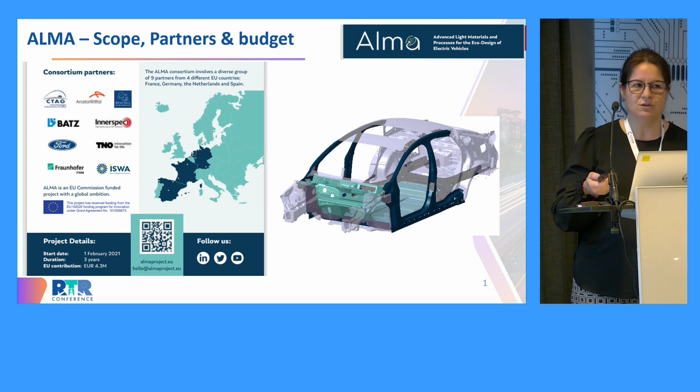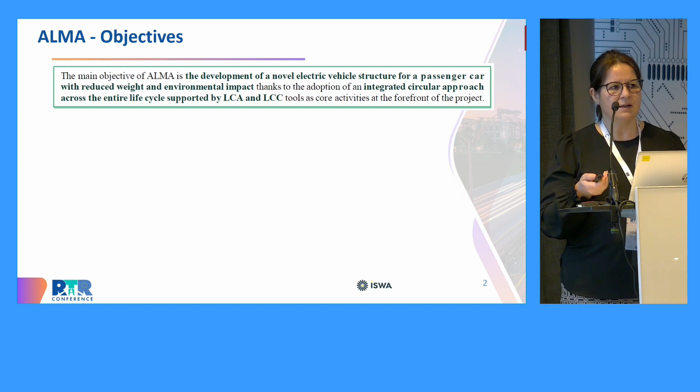The main goal was to develop a new structure for electric vehicles with reduced weight, with reduced environmental impact and with the big goal to increase the range of the vehicle. For this, our approach was to introduce eco-design supported by LCA and LCC tools. I think ALMA was a very ambitious project because we touched several different points. First, we start with the eco-design. I'm going to go in deep later, but the idea is to have several constraints in terms of lightweight, reduction of the consumption of materials, etc., to be sure that the parts we are developing have the minimum environmental impact. Then we work with different advanced materials. In this case, we chose advanced steels developed by Arcelor, and structural SMC, sheet molding compound, developed by BATZ.

Obviously, all these materials were characterized. We were to simulate the behavior, etc., both for materials and later for components. We had two innovative technologies concerning efficient separation and the health inspection.

That means that, as you know, we think that the very best solution for having an innovative structure is to combine materials, the multi-material. So we always say the right material in the right place. And this is fantastic, but you have to join these materials, and at the end of life of the project, you have to disassemble these materials.

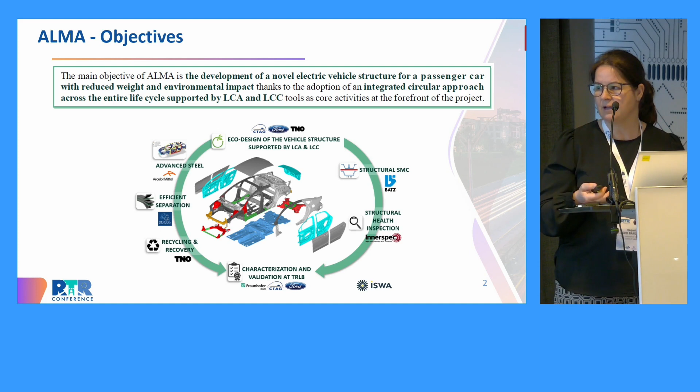Obviously, it's really important to be sure that the new materials can be recycled. So TNO was the partner devoted to this question. And when we talk about a new platform, a new structure for the vehicle, we had to be sure that all these parameters, all these new parts are working well together. So we need to simulate the parts, the subsystems, but obviously the full vehicle. So CTAG and Fraunhofer were responsible for this validation.

And we had also some physical prototypes to be sure that all the design is also feasible, and we are able to manufacture these parts. So as I mentioned, very ambitious project, touching many different questions, and the big goals were to decrease the weight by 15%, more or less, concerning the baseline, and to improve by 11% the LCA, the environmental impact.

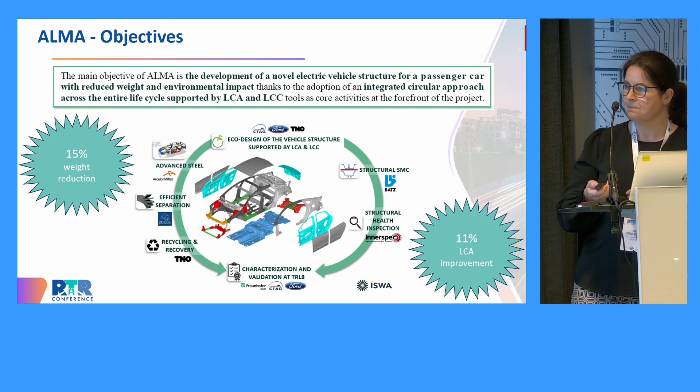Okay, this was the objective, so we started. We started with the eco-design, but as I mentioned before, supported by LCA and LCC. So, first point, we have several constraints. Several constraints due to the materials we are using, but also the constraints we have due to the structure we are developing. So we have to develop a new structure, but it is mandatory to pass all the crash tests. So the behavior of this new structure should meet all the requirements we have for the automotive sector.

The cost is important also. I always repeat that we are in the automotive sector, so for us, the money, the cost is a constraint itself. So we are approaching this project for lightweighting, but the cost is important, and the quantity we put was 3 euros per kilo saved. It's not a quantity I said, it's the market, the OEMs who put this quantity. So materials, I repeat, several different grades from steel and SMC materials. And with this constraint, we have a first bill of materials.

But we have to select, we have to define what are the best. I mean, there are several parts where it is really clear that steel, different grades of steel, are the best option. There are others where SMC materials are the best option. And there are others where we have a competition between these two types. So we define a material matrix. I have no time to enter into the detail, but you can guess that we put several factors to decide. Several factors such as lightweight, cost, feasibility to introduce in the production line, etc.

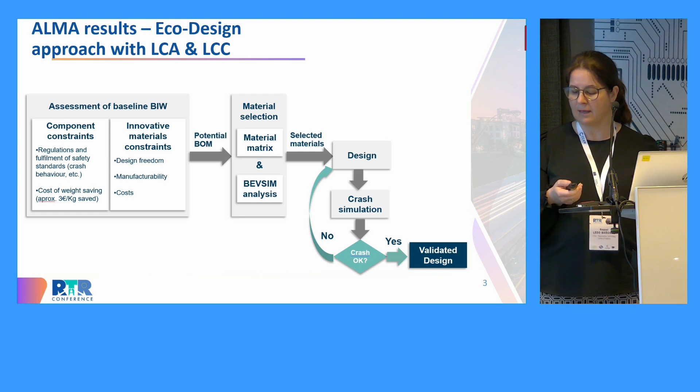So we have the materials, we have the design, and we go to the crash simulation. I told you before, we have to pass absolutely all the requirements we have in the vehicle. Frontal crash, lateral crash, with different angles, etc. That it always works well the first time is impossible or very, very difficult. We have to repeat the process. So we repeat the process, I don't remember how many times, but several times, obviously. And at the end, we have the final design that meets all the requirements.

So I talked before about the materials, these advanced steel materials and the structural SMC. Most parts of the vehicle were developed in steel, obviously, and we chose finally the SMC for the dash panel and for the battery lid.

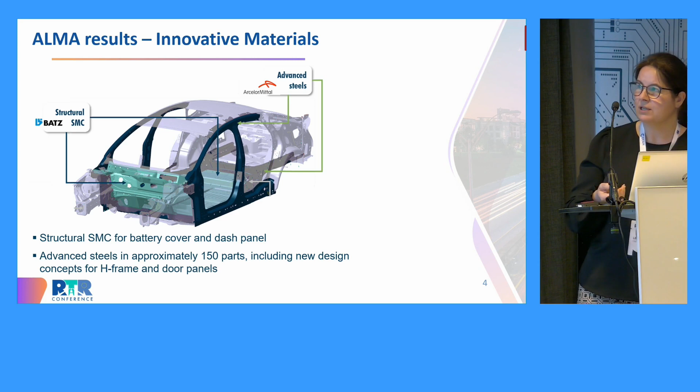In the case of the door panel, the door panel and the H-frame were also manufactured because, as I mentioned before, we want to validate all the structure, all the body in white, by virtual simulation, but we want to be sure that these new materials were able to be manufactured. So we carried out the manufacturing of these two parts.

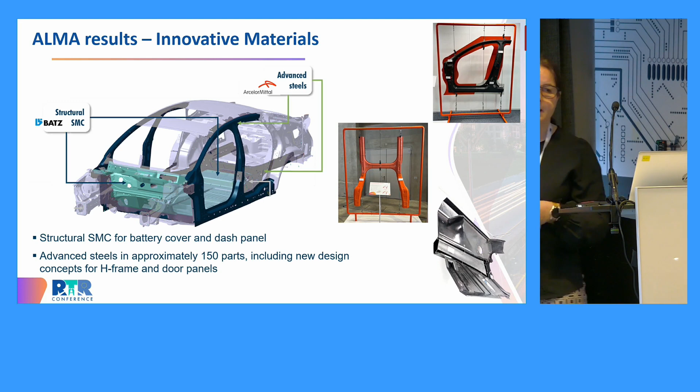It's important to mention, I think I didn't mention, that our baseline was the Ford Mondeo ICE, and now we have a body in white for a Ford Mondeo full electric. It's important to mention that these two parts, the H-frame and the door panel, originally were composed of several parts. I mean, the H-frame was composed of, I think, 15 or 17 parts, and the door panel of 4 parts. And now it's only 1 part.

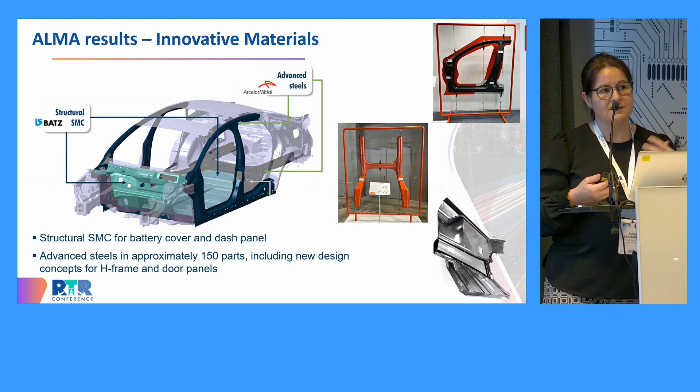That is due to the different steels that we are able to process at the same time in one shot. So you can guess that integrating these functions is a good solution to avoid joints, to avoid extra weight. And in the case of the dash panel, we have the physical prototype in SMC.

As I mentioned before, it's important to be sure that all these materials are recyclable. In the case of the standard steel, it's clear, it's recyclable. But we have a grade of steel that is laminated, thermoplastic steel, so we have to be sure that we are able to separate and process it. And yes, it works. And in the case of SMC materials, as you know, we have thermoset material, resin, and fiber, so we need to be sure that we can separate them. So people from TNO applied different technologies, solvolysis, mechanical recycling, and we could verify that it's okay, that we can separate these different materials.

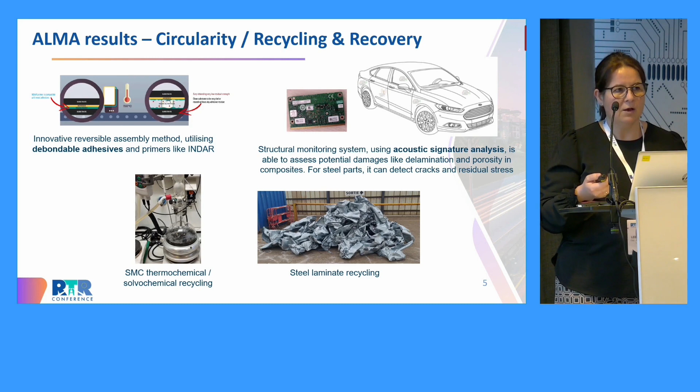I mentioned before the 2 different technologies to be sure that we can separate different parts that are joined by structural joining. And in the case of the system monitoring, we can be sure after a crash, for example, whether one part is right or not, and whether we can reuse it or not.

During these 3 years, we worked on the design, the manufacturability, the recycling, and at the end, we achieved a 22% weight reduction. Our objective, if you remember, was 15, so we are proud of this value. And this was the final prototype where all the design was integrated with these new steels from Arcelor and the new dashboard in SMC. So I think the results are really good. We can be sure that these new materials work properly, and we can have a new body in white, a new structure with guarantees to meet all the requirements.

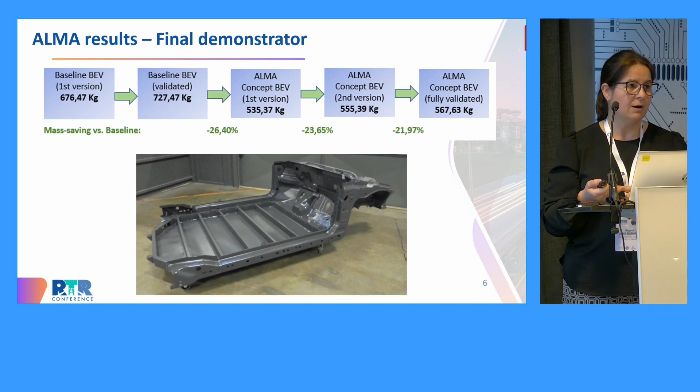If we talk about cooperation with other projects, when we applied for this topic 4 years ago, there were 4 other projects also funded by the European Commission: Levis, Flamingo, Revolution, and Fatigue for Light, which my colleague will speak about later. And we were joined in the Enlight electric vehicle cluster. This consortium of different projects helped us understand how many different approaches can be used to reach the same objective. We can learn from the results of other projects, so we think it was really useful to collaborate with these sister projects.

We always participate in different congresses and fairs. We had our last event at the Global Automotive Components and Suppliers expo in Stuttgart last year, showing our parts. So I always say that the technical work is important, but so is disseminating and communicating, not only to technical people who maybe already know this type of project, but to other people who don't know the projects being carried out in this area.

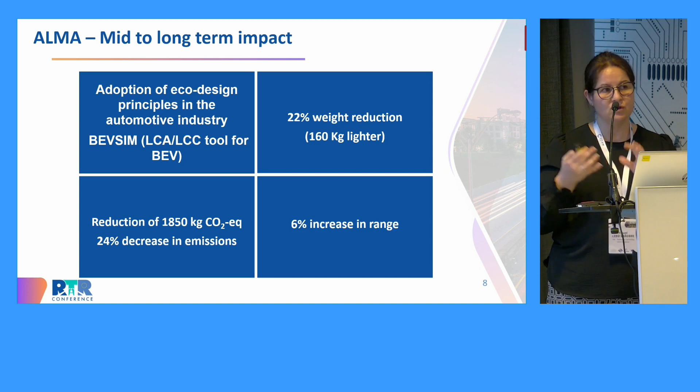I mentioned before that 22% weight reduction was achieved. That translates into a reduction of 24% in terms of environmental impact, if we talk about CO2 emissions. And all this increases the range of the vehicle by approximately 6%. The industrial partners, Arcelor and BATZ, are not here, but last week in our last meeting, they explained that they think that in the midterm, in some years, these new materials and these new design strategies will be included in new cars. So we think it's good news.

And now there is a video. I don't know if you can go. Yeah, that is. Thank you, Xavier. It's a very brief summary.

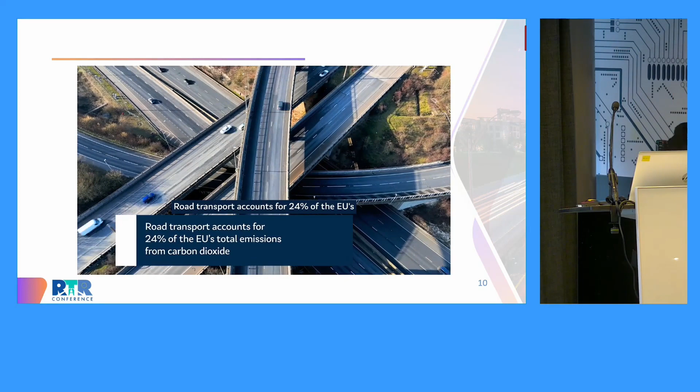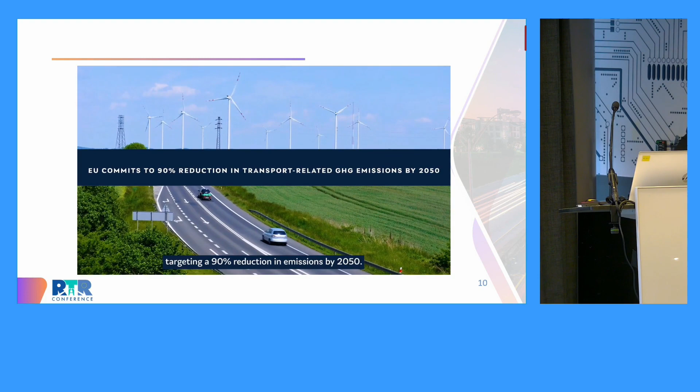Road transport accounts for 24% of the EU's total emissions from carbon dioxide. In response to this environmental challenge, the EU Green Deal is committed to decarbonize this sector, targeting a 90% reduction in emissions by 2050. The ALMA project plays a critical role in this transformation, which involves a significant shift from fossil fuels to electric vehicles that are lightweight, efficient, and sustainable.

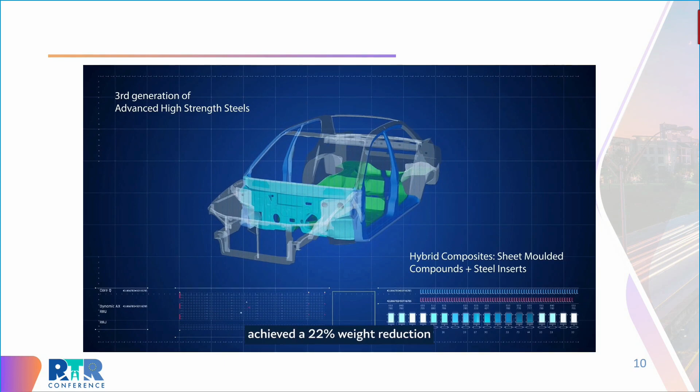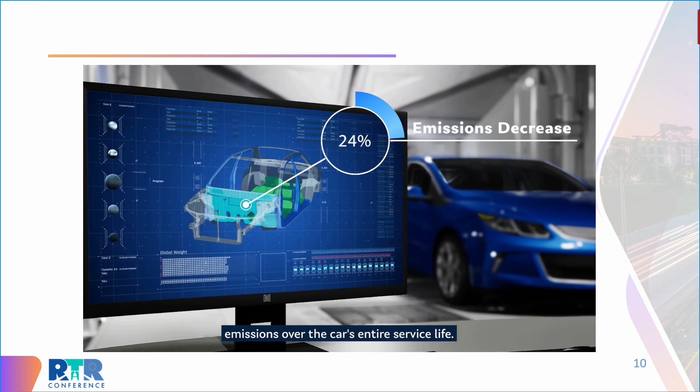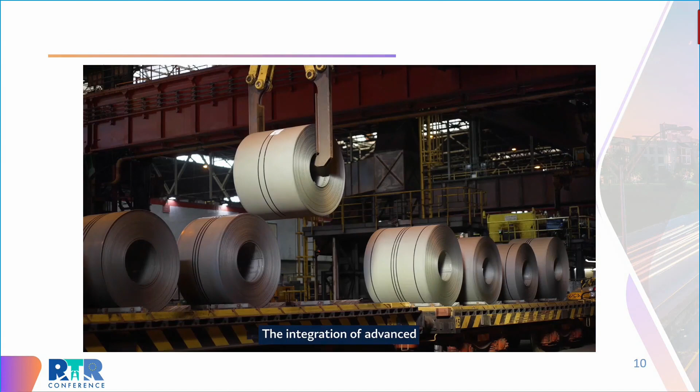By using advanced materials and an eco-design approach, the body in white of ALMA's concept car achieved a 22% weight reduction compared to the baseline BEV body in white. This translates to a substantial 24% decrease in carbon emissions over the car's entire service life. Innovative use of advanced, high-strength steels and lightweight laminates can revolutionize vehicle structures. The integration of advanced steels enabled the new H-frame concept, reducing parts from 11 to 1, decreasing the vehicle's weight and production costs. In some cases, sheet-molded compounds with fiber-reinforced textiles can replace steel for even greater weight and CO2 savings, while maintaining similar structural performance.

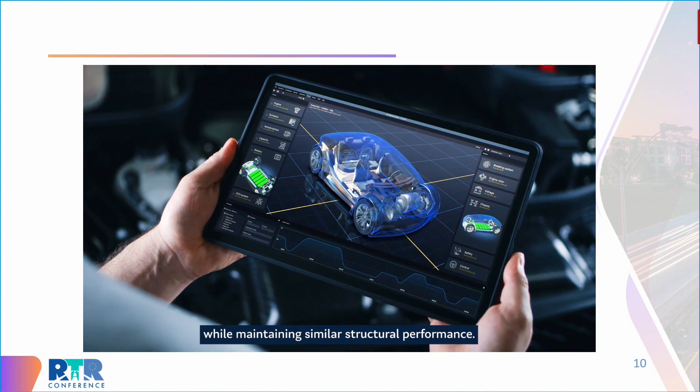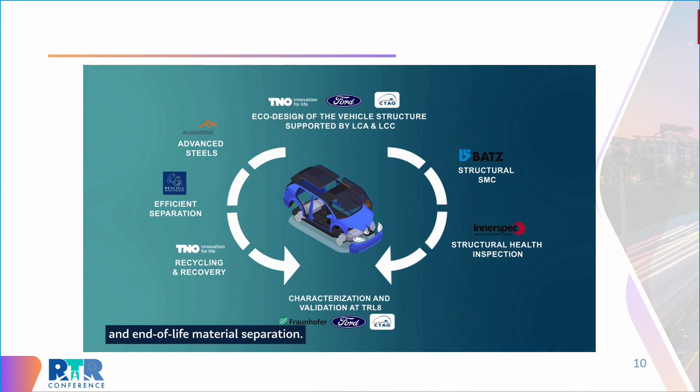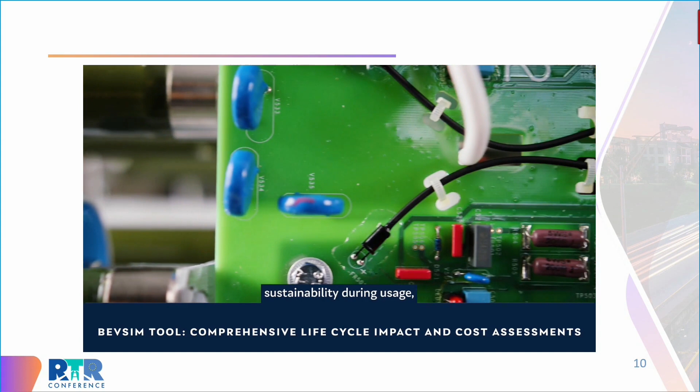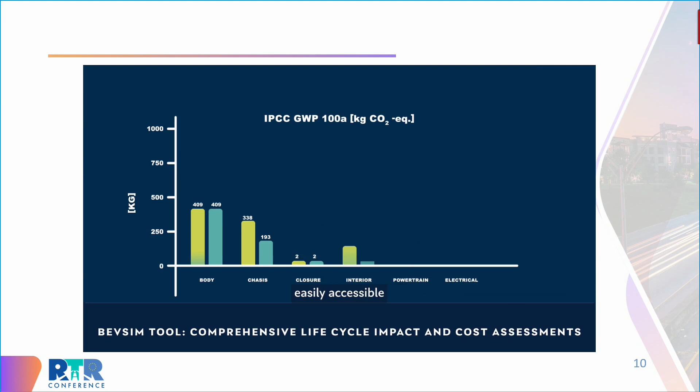ALMA's eco-design approach not only emphasizes weight reduction, but also focuses on circular economy aspects. This includes strategies for easy assembly and disassembly, efficient recycling, and end-of-life material separation. Rigorous safety and performance standards are validated using multi-scale characterization through computer simulations. These were used in simulated crash scenarios, allowing engineers to quickly test alternative designs and iteratively improve the concept, saving time. ALMA's approach to eco-design involves complex trade-offs. While some materials offer sustainability during usage, their production and end-of-life phases might cost more environmentally. The BEVSIM tool makes comprehensive life cycle analysis and cost assessments easily accessible to designers and engineers.

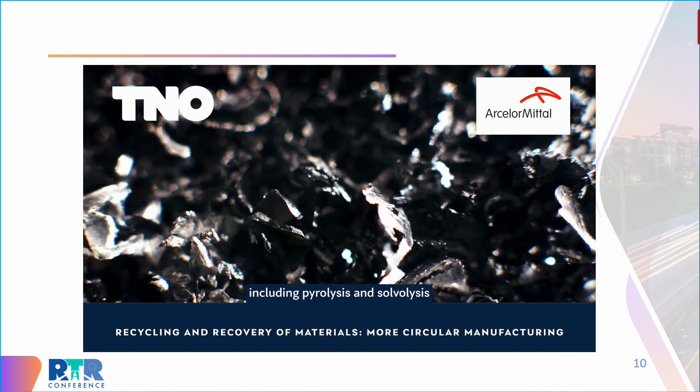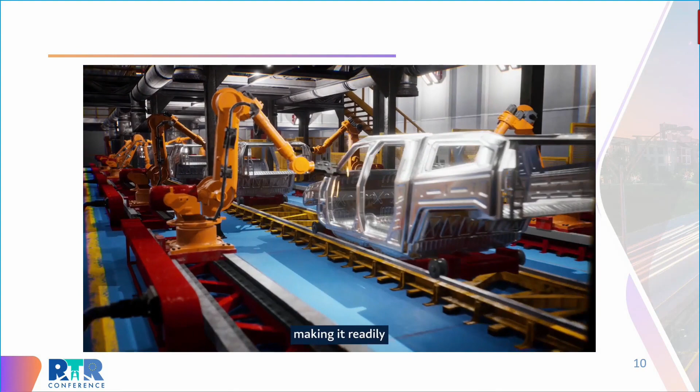Continuous structural monitoring is another key component which will allow for early fault detection and preventing critical failures. This enhances both vehicle safety and longevity. For end-of-life scenarios, ALMA applied debondable adhesive for efficient separation of materials through heat triggering. ALMA identified potential routes for recycling and recovery of advanced materials, including pyrolysis and solvolysis, paving the way for more circular manufacturing. In conclusion, the ALMA eco-design integrates with current automotive manufacturing processes, making it readily adoptable by the industry. You too can use this approach and advanced materials to increase range and performance while saving materials, energy, and CO2 emissions.

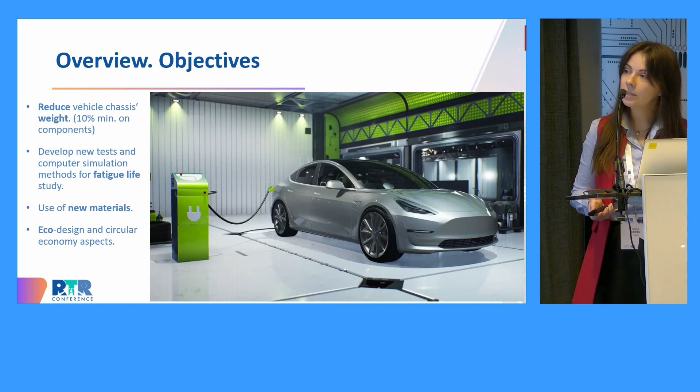Of course, we wanted to foster the implementation of new materials, which can give an interesting weight reduction potential, I would say. And we were committed to using eco-design and circular economy aspects while we were performing this lightweight assessment on the chassis components.

Here you can see our first project video. We have a new one, by the way.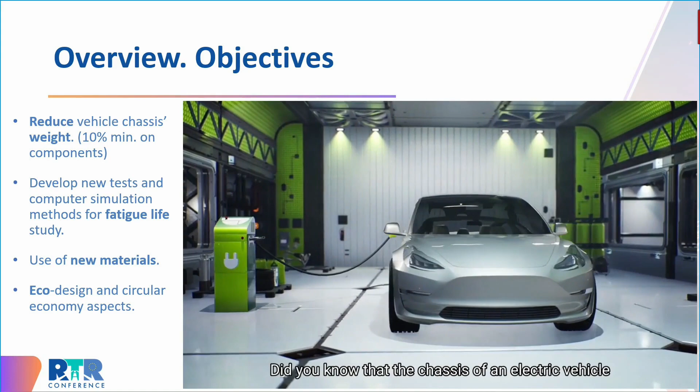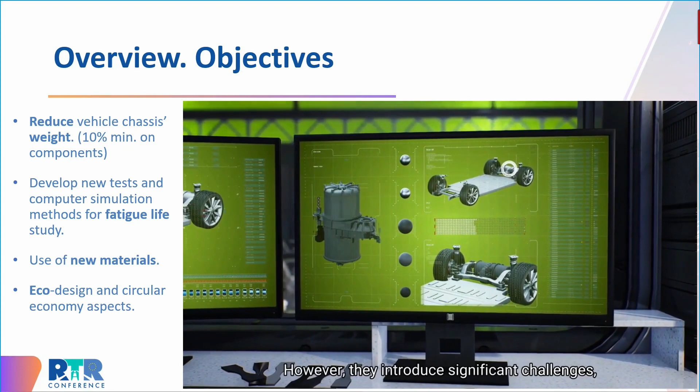The chassis of an electric vehicle accounts for 50% of its weight. What if we could reduce the weight and thus increase the vehicle range while contributing to a more sustainable mobility? Lightweight materials have been around for some time, with great potential in reducing the vehicle's weight without compromising safety. However, they introduce significant challenges related to part design and performance prediction.

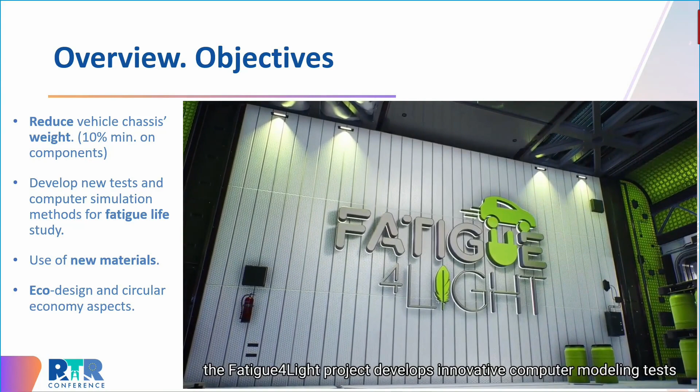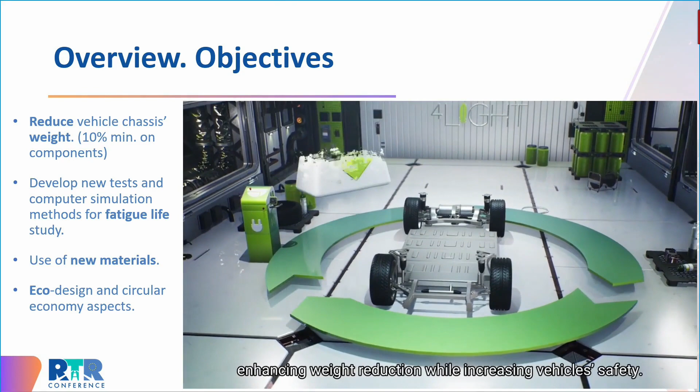To solve these challenges, the Fatigue4Light project develops innovative computer modeling tests and experimental methodologies to select the optimal materials for lighter vehicle chassis and reduce the testing time for new materials. Based on eco-design and circular economy values, Fatigue4Light aims to boost the use of lightweight materials adapted to the chassis parts of electric vehicles, enhancing weight reduction while increasing vehicle safety.

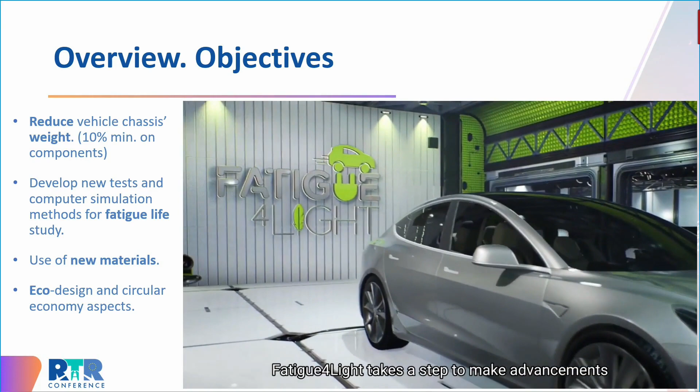As one of the first projects tackling weight reduction in electric vehicles' chassis parts, Fatigue4Light takes a step to make advancements in building a zero-emission future, while simultaneously minimizing production losses and meeting the industry needs.

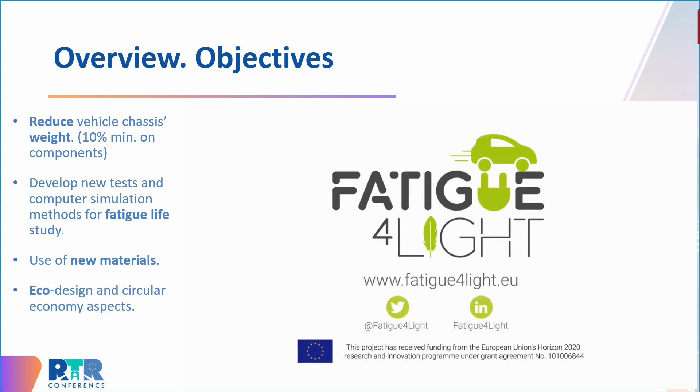Let's go to results presentation. So here I'm going to show results from several different perspectives. And first I want to share with you all the work that we've done from the experimental point of view. Several teams were intensely working these past 3 years on several different campaigns at different levels, at different scales.

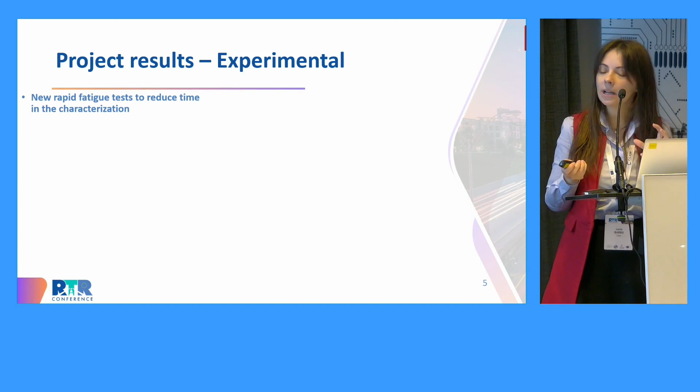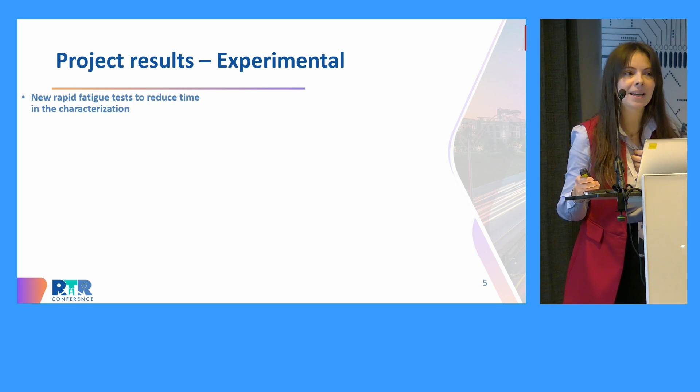And we started thinking at coupon scale about how we wanted to reduce the experimental time needed for a complete, comprehensive fatigue experimental characterization. Now, I don't know if you are familiar with all that fatigue entails, but I would say one of the main characteristics when you are dealing with fatigue is that you need to have a very, very thorough experimental campaign to consider that you have properly characterized your material. And that means you need to spend a lot of time experimentally. Fatigue tests are super, super expensive.

This is why we devoted a lot of time in the project working on fast fatigue characterization procedures. These are fast fatigue tests that allow you to go from maybe 1 month that you had devoted to obtaining your SN curve, which is stress number of cycles curve, to as little as 2 days for one SN curve, or if you are only interested in the concept of fatigue limit, you can have it in 4 hours. So the reduction in experimental time really is quite significant.

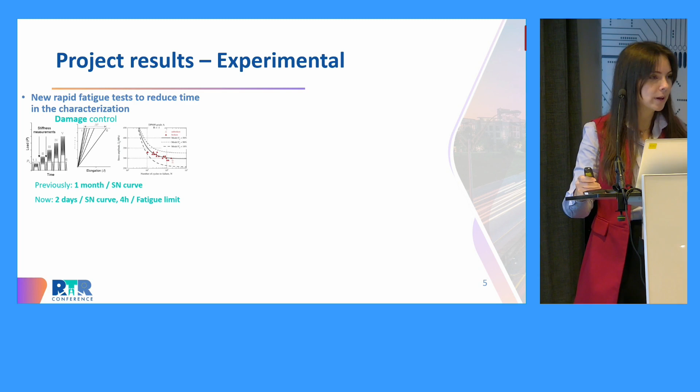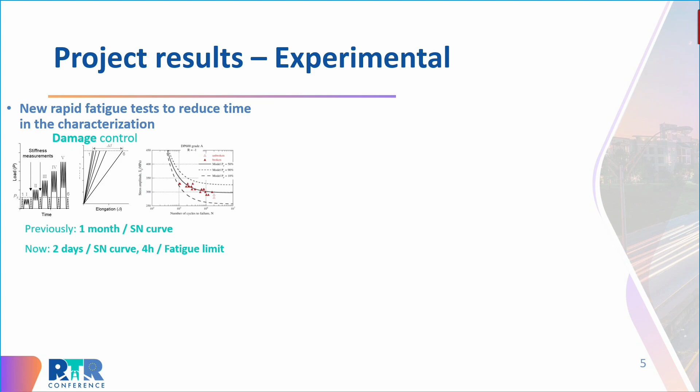We developed 3 different methods. Here I can show you details only for the damage control method, or what we call stiffness monitoring method. But we also have the self-heating method, which was developed by our partner Arcelor, and we also have the ultrasonic testing procedure, which was developed by the Politecnico di Torino, a partner in our consortium also, for very high cycle fatigue specifically. If you want more details, we have published papers on this. You can have all the information available there.

After that we went to a second experimental block, I would say, where we were focused on the manufacturing effects on the behavior and the performance of fatigue. So chassis components are manufactured obviously using quite standard, I would say, procedures, so punching, trimming, forming, welding, all of these you will find habitually used on chassis components, right?

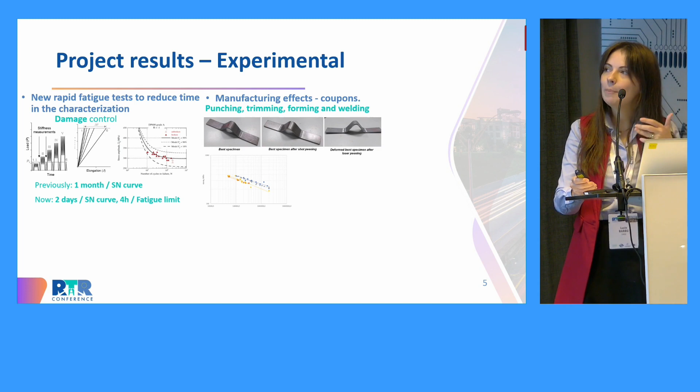We wanted to know how the nonlinear effects generated by these manufacturing processes in your component would influence fatigue performance afterwards. Here you can see, for instance, some SN curves that we derived on these punched, formed specimens, etc.

After this campaign, we wanted to complicate the problem a little bit more. So we went to a slightly more complex geometry, not just coupon scale, but a lab scale demonstrator. Here we chose an L-shaped profile, and we wanted to compare the performance between a fully polished specimen and a geometry where we had some rough edges and some punched holes that were not surface treated, not polished.

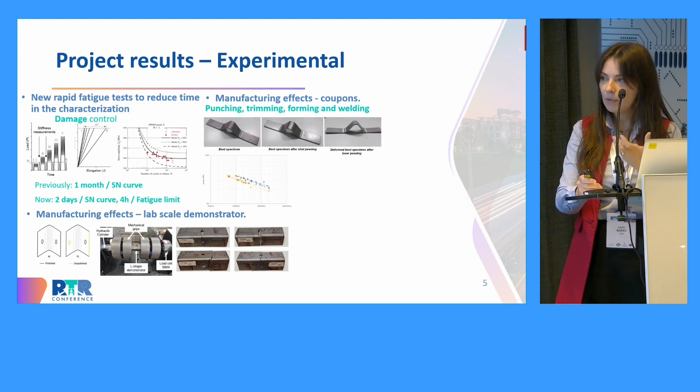And here you can see the results, for instance, from the experimental campaign made on this L-shaped profile. The last year of the project was devoted, of course, to experimental tests at component level.

All of these tests were super important for us to find out how the numerical modeling we developed in the project was able to capture this experimental performance. And now this is the perfect opportunity to speak about the other line we followed in the project, which is the numerical modeling approach.

As I said, the keyword for our project is fatigue performance. So the numerical modeling we developed was specifically targeting the fatigue behavior, and specifically the whole process of degradation which occurs under cyclic loading, from crack initiation until the complete failure of the specimen. I'm mentioning this because this is definitely something you cannot find in standard fatigue tools available in the industry that industrial companies use.

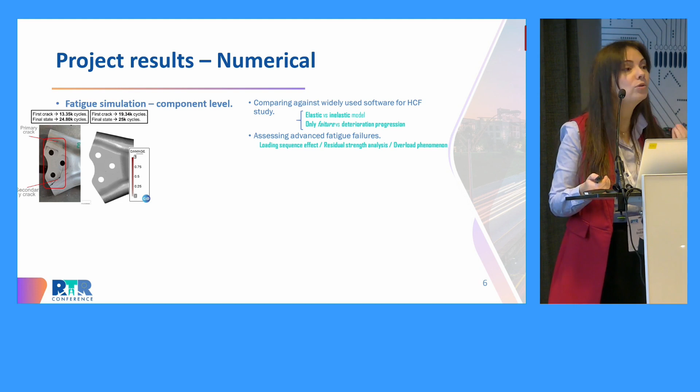Why? Because there are a lot of plugins used for solving fatigue, such as nCode, FEMFAT, many of them, very famous, and they do a great job. But they will only give you an elastic response, and they will only predict when damage starts on your geometry, at which number of cycles and where. But they won't tell you what happens once that damage has initiated. Maybe it will take you to complete failure, but maybe it will last 100,000 cycles until you reach complete failure. How do you know if the damage initiation has been critical for your component or not?

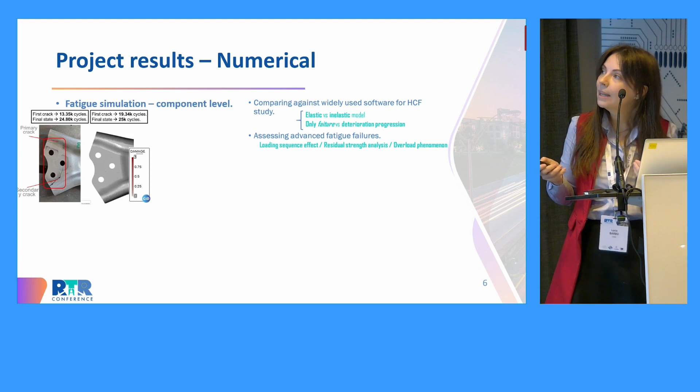So we worked on the fatigue modeling approach in this project to provide a full deterioration progression at component level. That was our target and our objective.

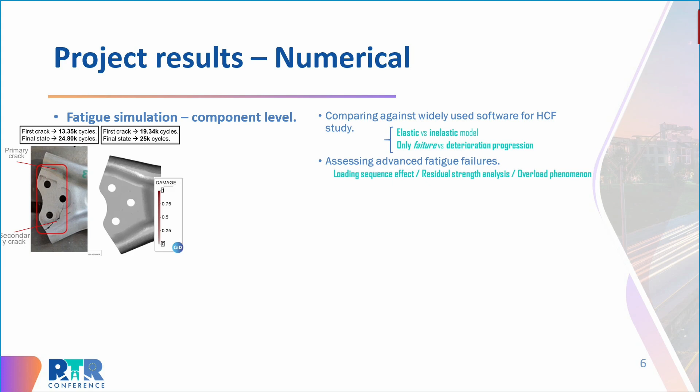Apart from that, we were very interested in assessing fatigue from a comprehensive perspective, in the sense that we wanted to prove we were able to capture the load sequence effect, which is very important because your components are not going to be subjected to the same cyclic load with constant amplitude throughout their entire life. You're going to have some dissipation events that cause nonlinear effects, maybe plasticity, and after that you'll continue with a different type of cyclic loading. A lot of things can happen on your component.

We also wanted to check the residual strength analysis: what happens when you apply a specific number of cycles of loading, and after that you load the material to failure. Did it fail at the same level of load as its initial strength or not? The answer is not. And also overload phenomena.

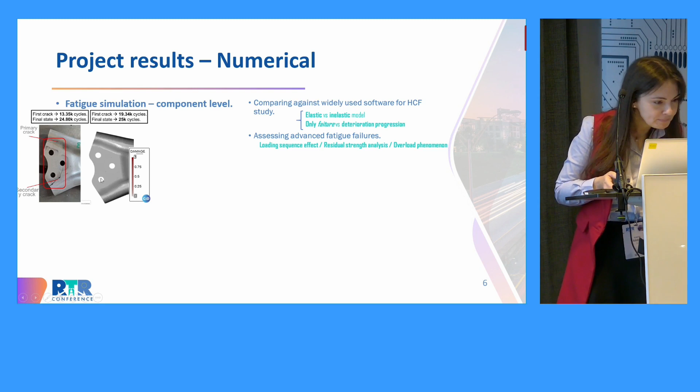This analysis was done, and what I'm showing here is the results from the numerical simulations at component level. We simulated coupon level, we simulated the lab scale demonstrator, but in the interest of showing you the most spectacular result, I want to show only the component level.

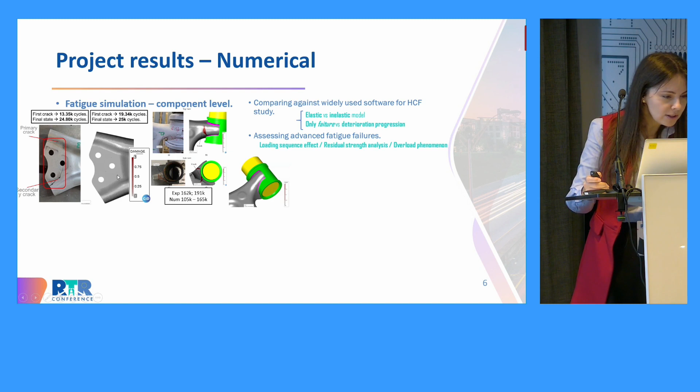You can see the crack propagation occurring, for instance, in this welding simulation, which was done on a lower control arm. You can see here this very interesting failure, which was obtained with a primary crack and then a secondary crack under fatigue.

It started propagating at about 19,000 cycles, and after that it failed completely at 25,000 cycles. This was a numerical analysis done on the lower control arm.

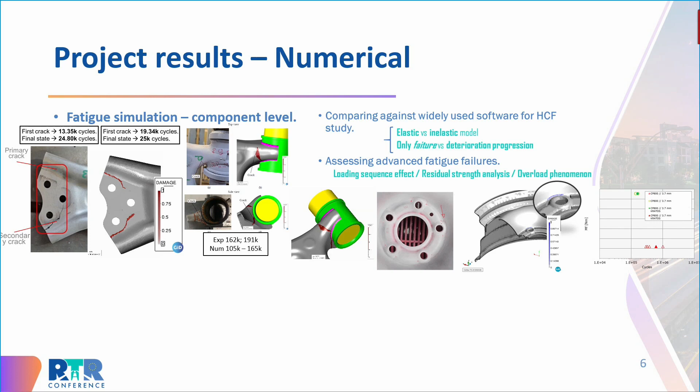After that, we had another numerical campaign, which was done on the wheel. What we are always comparing from the numerical point of view is the failure location, so the presence of the nonlinear effect on a geometry in the numerical simulation as compared to the experimental test, and it was in very good agreement.

After that, of course, we check if the numerical simulation is capable of predicting the actual fatigue life which was observed in the experiment. If not, it doesn't provide any type of usefulness to the industry. And again, we got a very good agreement between the numerical and the experimental part.

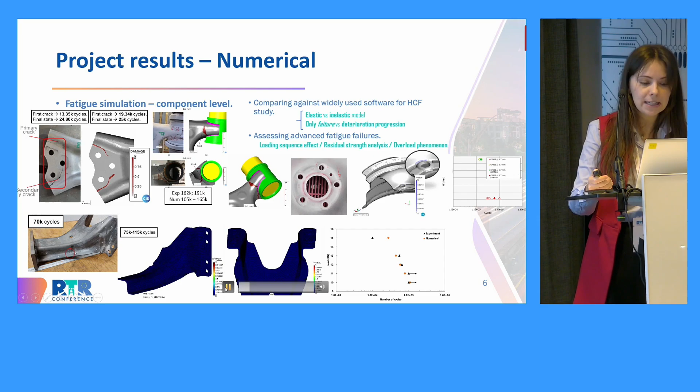We had a different demonstrator also, which came from the heavy-duty vehicles part. We had the cross-member beam, and this demonstrator was loaded in different directions with cyclic loading. Here I can show you the simulations with the crack propagation for the load being applied in two different directions. And again, comparing the life obtained numerically versus the experimental result, we saw that we had a very good agreement here.

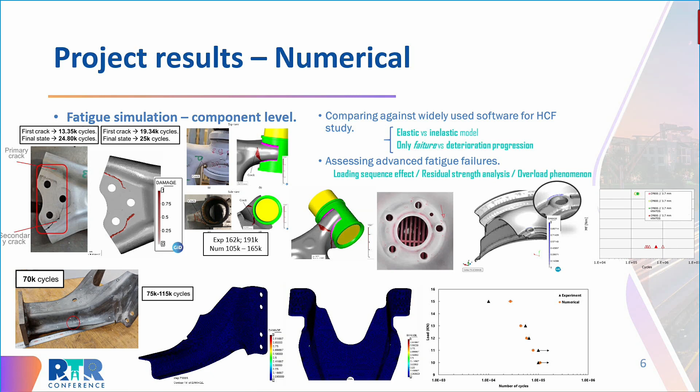We did some experimental tests, we did some numerical simulation, but in the end the purpose was to reduce weight. So how did the different material solutions that we focused on in the project perform as compared to what is normally done, state-of-the-art, on these components?

For instance, for the lower control arm, we manufactured two different versions: one in CP980, complex phase of 980, and the other in a hybrid multi-material solution. For the CP980, we could get a weight reduction of about 12% with no performance loss. However, if we took into account the design optimization process, we could push it further up to 20%. Regarding the multi-material version, we got a very good weight reduction, about 35% potential.

So that's good, but that's not everything. I will speak more about this later on.

Regarding the campaign on the wheel, disc plus rim, we studied the performance of a demonstrator manufactured with CP800, and we saw that the weight reduction we were able to achieve on this demonstrator was only 5%. This gave us some thought, and we started to think how we could improve the performance of this material for this demonstrator and perhaps enhance the weight reduction.

So we started to focus on surface treatments that could help us get better fatigue performance. We manufactured and tested another demonstrator in CP800 with shot peening on the disc only, and we saw that it improved the fatigue performance so much that it further allowed us to reduce the thickness and the associated weight by up to 9%.

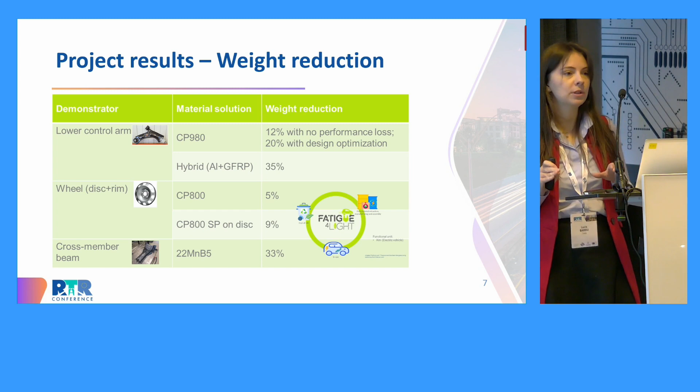So I've shown you weight reduction. Is weight reduction everything? Should I just stick with the maximum value I get here, which is the hybrid multi-material solution, and say, great, I'm going to manufacture my chassis in this multi-material solution because look at all the weight I'm going to reduce? Well, obviously, no, because there are a lot of aspects you need to consider.

Specifically, from an eco-design perspective, you're interested in how much you reduce CO2 emissions, end-of-life considerations, recyclability, etc. This adds a whole new dimension to these results, and we have some very interesting results in the project that we really want to share with the entire industrial community and the European Commission community, showing what performs best when you compare several different aspects.

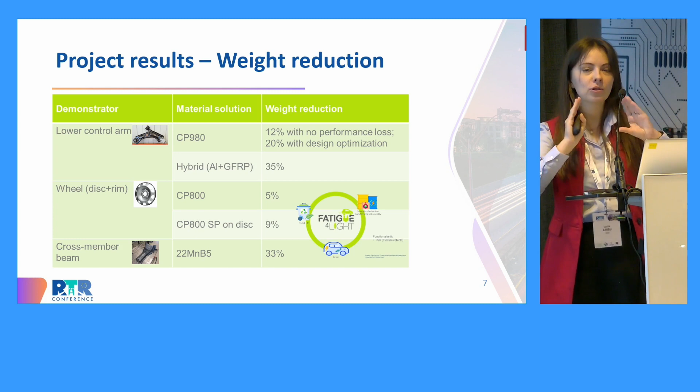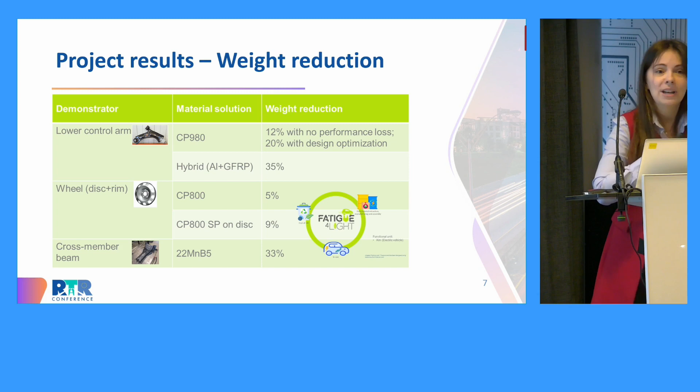For instance, we had a technical block where you rank the technical performance of the materials. We had a second block, the eco-design or sustainability block, where you take into account the weight reduction, the CO2 emission reduction, etc. And we had a third block, the economic aspects. Obviously, cost is super important. You can have a great solution, but if it's super expensive, it's not going to get into, I would say, middle-range vehicles. It's only going to go into the premium ones, right?

But the analysis from this multi-criteria point of view will give you a different idea with respect to the performance of these material solutions. And this is something that we will publish in the future, so please follow us and check our publications, okay?

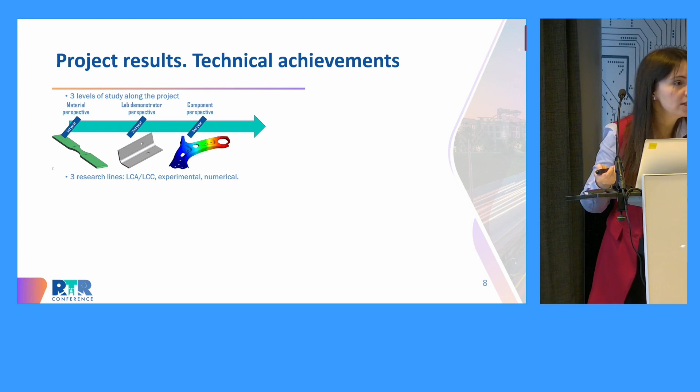Okay, so let's have an overview of the technical achievement. As I said, we moved through different scales: coupon scale, lab scale, component scale. But the purpose was to discuss about vehicle scale, right? So all of this served into taking us to an estimation of the weight reduction that we were able to achieve with the procedures developed in the project at vehicle level.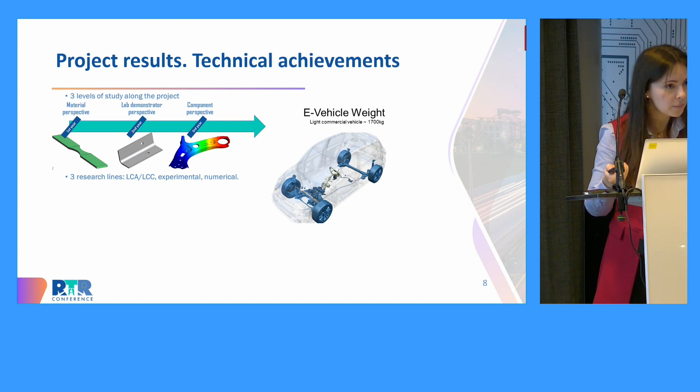So we were specifically interested in how much we were able to reduce the structural weight of the vehicle, and here we considered as structural weight the chassis and also the body in white, which leads us to about 55% of the weight of the entire vehicle.

And when discussing about this, what we were interested in is seeing how the weight reduced if we directly substituted those materials which were currently state-of-the-art for our components with the materials that we studied in the project, and we assessed comprehensively from all of these different scales' point of view.

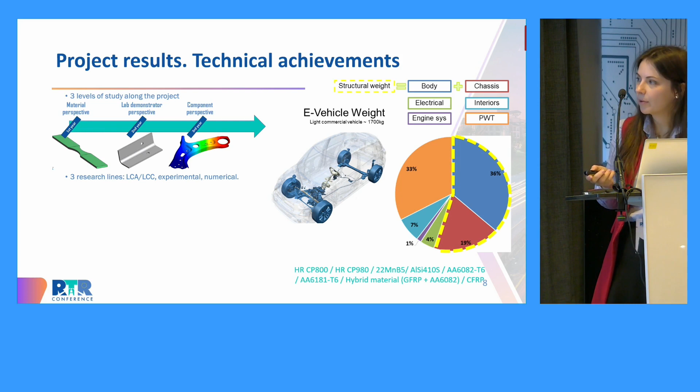So in the project we studied, of course, the CP800 for applications where it was not already state-of-the-art, then the CP980 for some other applications, the press-hardened steel, a specific stainless steel, 2 different aluminum alloys with Series 6, and of course the multi-material solution with these 2 outer layers of aluminum and an inner core of glass fiber reinforced polymer. And another solution that I haven't spoken about here, but it was also studied in our project, the carbon fiber reinforced polymer solution.

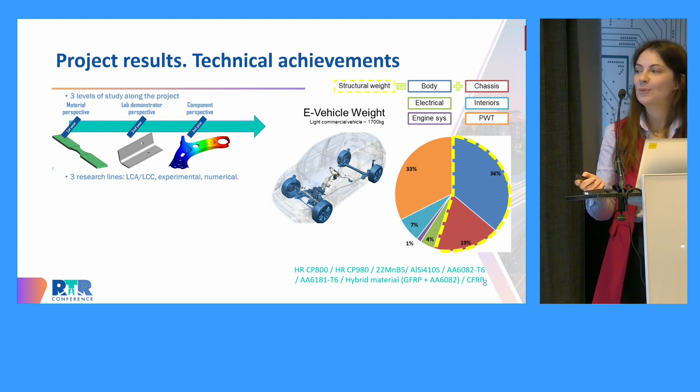Okay, so if you directly substitute the materials which are made now in a specific state-of-the-art on specific components, and you substitute them with these materials that we studied in the project, what we saw is that you could obtain with this direct transition, I would say, a 15% weight reduction after using fatigue for lightweight materials. But as I said, this is taking into account only the substitution of specific components which are super easy to be replaced. However...

If you afterwards do a lightweight average, I would say, at the whole structural weight of the vehicle, the overall reduction is lowered, so you can only get to an average of 10% reduction over the whole structural weight. And this, I have to say, is only taking into account components which are manufactured from steel sheets, but you have a lot of different types of components, and they are not always manufactured from steel sheets.

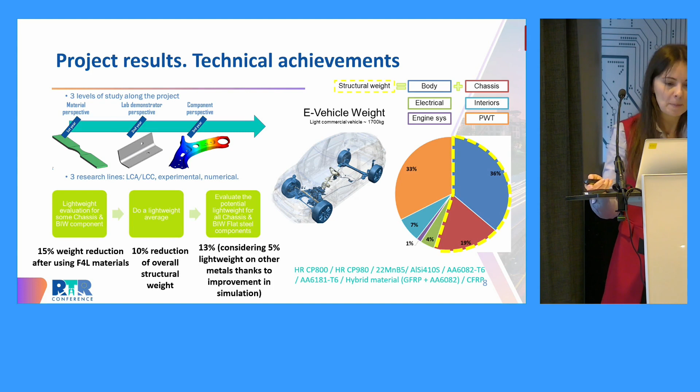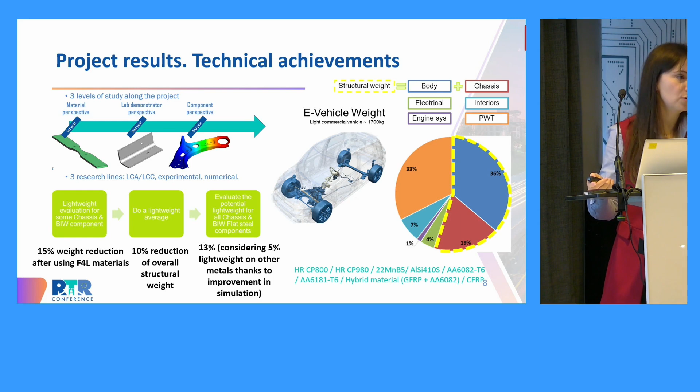So if you evaluate the potential lightweighting for all chassis and whole body-in-white flat steel components, you can get to about a 13% reduction in weight, and this number was achieved considering that you could get an approximately 5% lightweight potential on other metals, which was thanks to the improvement that you got in simulation due to this procedure that we developed in the project, okay?

Okay, now let's switch topic, okay? We worked a lot in these past 3 years on dissemination because we wanted to take the message of everything that we were developing in the project as much as possible to a very large community.

So I don't know if you heard about our project before coming to this session. If you did, then we did a good job disseminating, and if you didn't, then we still have some additional work to do. But basically what we focused on was a lot of scientific publication. We have currently 13, but there are still about 3 which will be published soon. They are under review.

We had a lot of dissemination events, conferences, congresses, workshops, a lot of specific project events, 3 webinars, then 2 cluster webinars together with our sister projects in the cluster that we formed. We had 1 physical workshop with key companies in the industry, super interesting. We could get some perspectives on what they thought about our development.

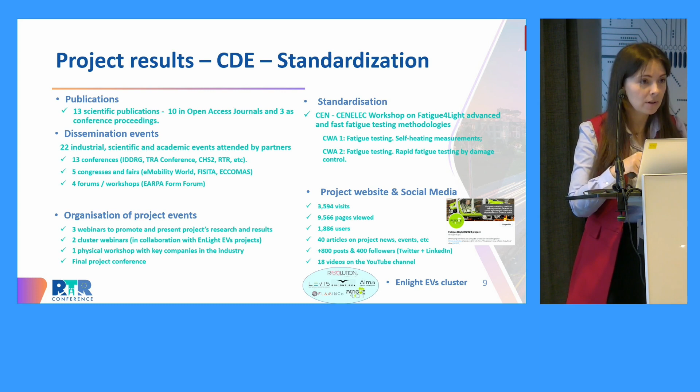And we had a final project conference where we shared more in detail, I would say, the work done in the project. And I'm mentioning this right now because a lot of the materials from these events are available online. So if you're interested in a specific development from our project, look for our YouTube channel, look for these events. They are accessible from the webpage of the project, and you will find the presentations, you will find the backup for these presentations available for you to check, okay?

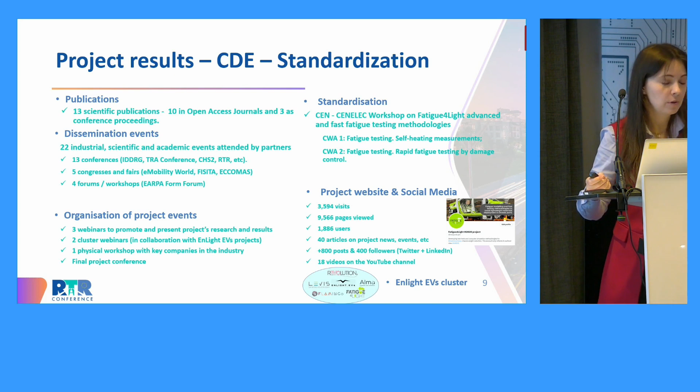Standardization, very important, because we said we developed these fast experimental fatigue procedures. Okay, but we want to make them available to a really large community that might find them useful. You can't do this if you don't have them standardized, okay?

So we've worked intensely on a standardization procedure in our project, and we are very close to getting a standardization agreement on two different types of fast fatigue experimental testing. One of them is the self-heating measurements promoted by ArcelorMittal, and the other one is the rapid fatigue testing by damage control promoted by Eurecat.

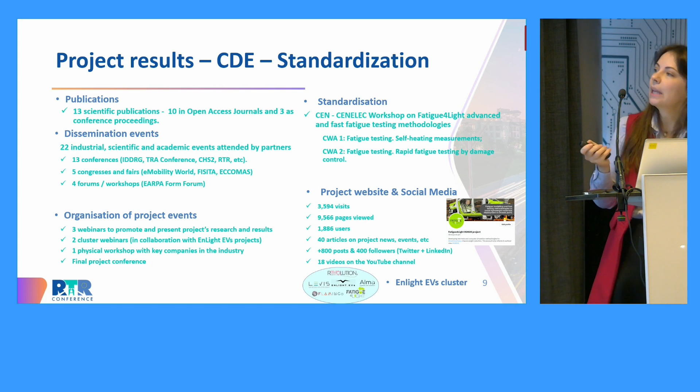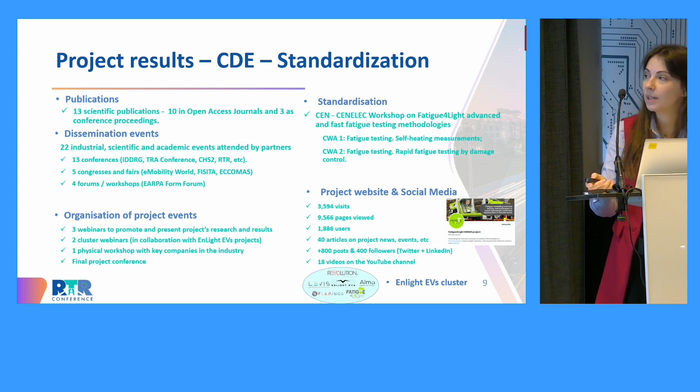Okay, mid to long-term expected impacts of the project. How does the Fatigue4Light project impact the industrial community, and I would say the community in general? Well, first, we analyzed the performance of new materials in our project, which we saw had a very interesting weight reduction potential. So this was definitely something to consider when you're analyzing potential innovation for your chassis component.

Then, regarding the fast experimental techniques and the numerical modeling techniques that we worked on, they are obviously useful tools if you want to have a smart design of vehicle components. So this is another impact that we are bringing to the table. Increased efficiency in vehicle development. Do we manage to have this impact?

Yes, because of the numerical modeling, which serves as a tool for the industrial community to detect when nonlinear processes are going to initiate in the geometry and how they are going to propagate until total failure. And new experimental tools, which, as I said, will help you significantly reduce the experimental time you devote to fatigue characterization specifically.

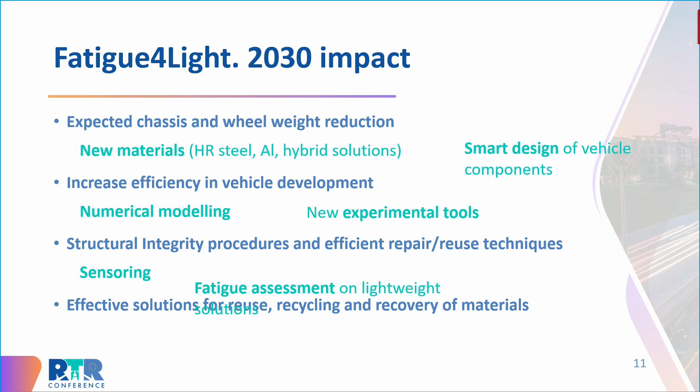Then, structural integrity procedures. We are targeting this by the sensoring that we did in the project on specific components, and this will help monitor the performance of your component, the structural integrity of your component, and based on the fatigue assessment on lightweight solutions.

My presentation got a little bit disarranged, I would say, but it is what it is.

You will be able to fulfill this impact, because if you use this fatigue numerical modeling that we developed in the project, and you know how the degradation process is actually going to occur due to the cyclic loading on your geometry, that will help you make better informed decisions regarding your maintenance schedule. Do you have to switch a specific component at the first sign of damage initiation? Maybe you do, but maybe you don't. How do you know? Well, if you use a tool that will help you decide.

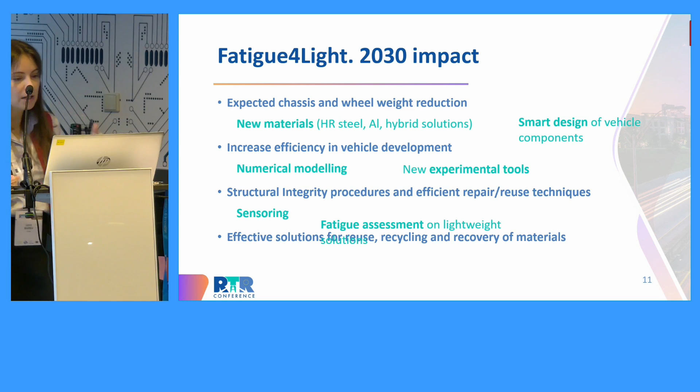Okay, effective solutions for reuse, recycling, and recovery of materials. Here, the team at RISE, Research Institute of Sweden, a partner in our consortium, worked to propose a dismantling technique for the hybrid solution, the multi-material solution of the lower control arm. Now, regarding European policy objectives, Fatigue4Light is contributing to a more competitive and smarter Europe because of these tools that we've developed, which can help you to have a faster and optimized design.

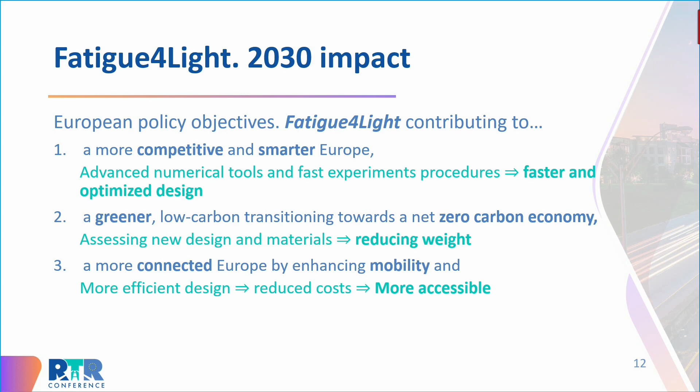How are we helping to achieve a greener net zero carbon economy? Well, use these tools that we've developed. I'm repeating myself a lot, but they are really useful on so many different levels. You are going to be able to reduce weight. If you reduce weight, you can lower the fuel expense, or you can increase the range. Either way, you have some win-win situations there.

A more connected Europe by enhancing mobility. Yes, because if you have a more efficient design, this leads to reduced costs, and this can make the solutions that you are offering to consumers more accessible. They can make them cheaper. So more people can have really amazing cars and drive them happily on the road.

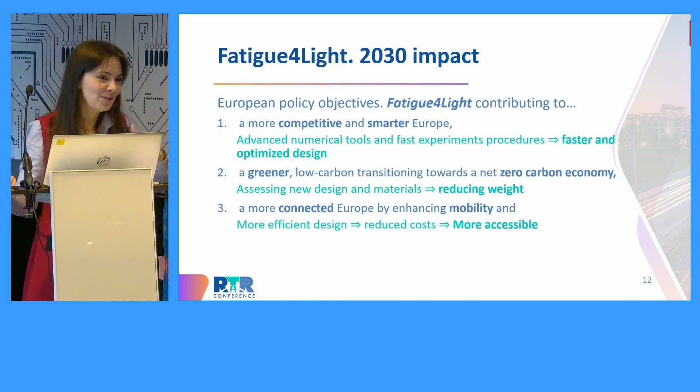So we had an overview of how we could achieve weight reduction with the structure of the vehicle. First, a presentation on how we could do it on the body in white. Second, a presentation about how it can be done on the chassis components.